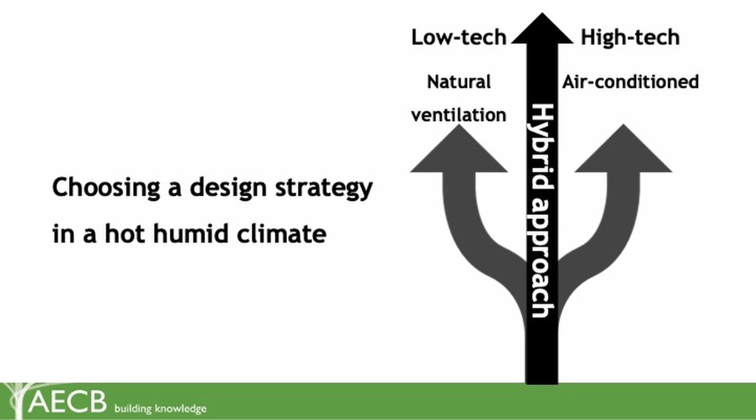So generally, when we're designing in a hot, humid climate, and even in hot arid climates, you kind of have to decide, do you go the natural low-tech ventilation route, or do you have to go the high-tech air conditioning? Because, particularly in the hot, humid climate, those are 2 completely different routes. They're not very similar. In a hot, dry climate, they're a bit similar. The strategies are very much the same. But we wanted to try looking at a hybrid approach. And that's part of what we're going to be talking about.

So one of the first challenges of designing in the Global South: power cuts. They last so long. In Sudan, they last 8 hours, 3 times a week. And that's a long time. And you don't really understand the impact of a power cut until you experience it. It's so hot there that you don't want to think. You don't want to do anything. Life stops. Even if your laptop is charged, you don't want to use it anymore because you're so tired.

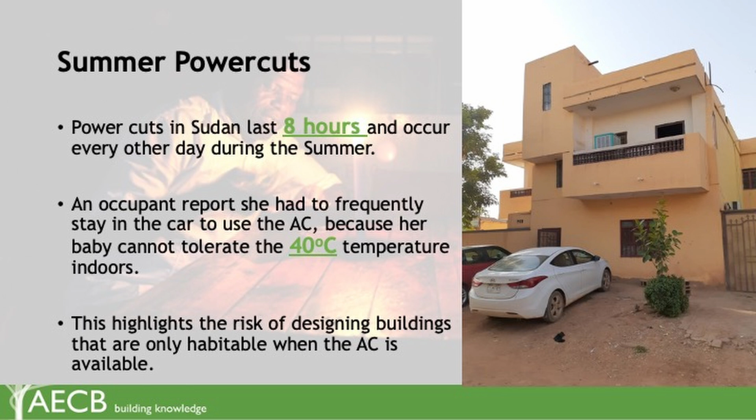And this is a photo of a house I did some research in. For the occupant in this house, when there was a power cut, it would reach 40 degrees in there within an hour of turning off the air conditioner. And she only had that tiny little balcony to stay in. And that balcony is so close to that wall that is just radiating heat. At the same time, you can see just how high it is. So you're not getting any actual shade from the sun, and you're getting the heat coming back to you from that thermal mass behind you.

So because of that, she opted to stay in that car over there. And she would stay there for hours with her toddler, because her toddler would just not stop crying because of how hot the house is. So imagine if you designed a building that only works well when air conditioned, when mechanically ventilated, and then this happens 3 times a week, 8 hours a day. So it's not an intermittent problem. It's not something that might happen. It's something that is going to happen, and quite frequently. And that's a risk you have to consider whenever you're designing in the Global South.

The other issue is that you have to consider, what about all the other buildings in the area that you're designing in? So even if you're going to design a very highly efficient building, if everyone else around you is using natural ventilation and just fans, which don't consume a lot of energy, your building is going to consume significantly more than they are. And that kind of feeds into your decision, do I air condition this building or not?

So that's in the context of Tanzania in our project. The houses surrounding us, the area was all naturally ventilated. People were used to a natural way of living. So it made less sense to introduce a highly efficient enclosed air-conditioned building. But, for example, in my research project in Sudan, people were slapping air conditioners onto buildings that were not prepared for it. So they were very, very highly consumptive. So trying to achieve that highly efficient air-conditioned building would make more sense in that urban context in Sudan than it would in the rural context of Tanzania. And it's just that decision-making process that you have to go through when you're designing your building. What is the area surrounding me?

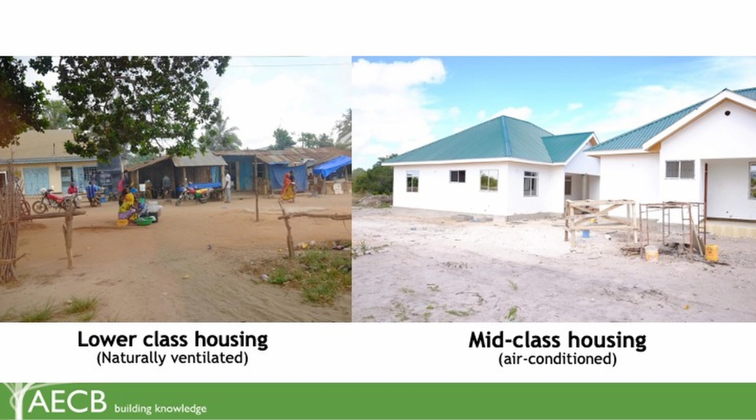So these are some of the houses in Tanzania. You can see they have a mix of both. The predominant is those lower classes, but recently some areas have been knocked down and people are building closed middle-class houses with air conditioners. But the problem is, again, they're just a normal house with an air conditioner. They're not designed to be air conditioned. That's kind of one of the problems.

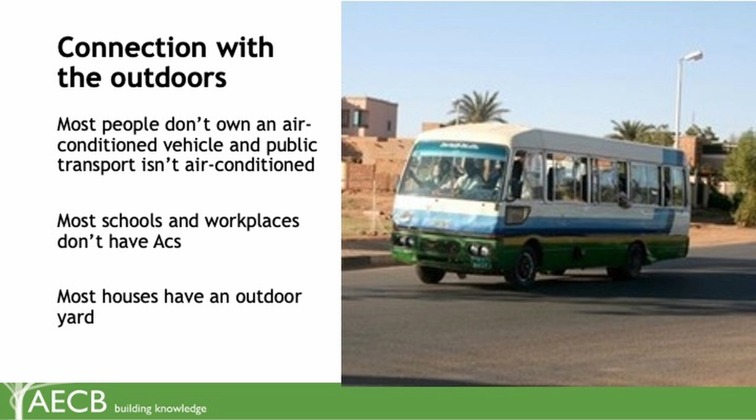Another factor you really need to consider when choosing what model: how connected are the people to the outdoors in your context? So in the context of Tanzania and in the context of Sudan, people use public transport, which is not air-conditioned, as I can attest. Many schools and workplaces don't have air conditioners, and people have yards in their houses. So people interact a lot with their outdoor environment, and that's more so in rural areas than urban. In the urban area, they're more likely to have a car, so you have to kind of consider that.

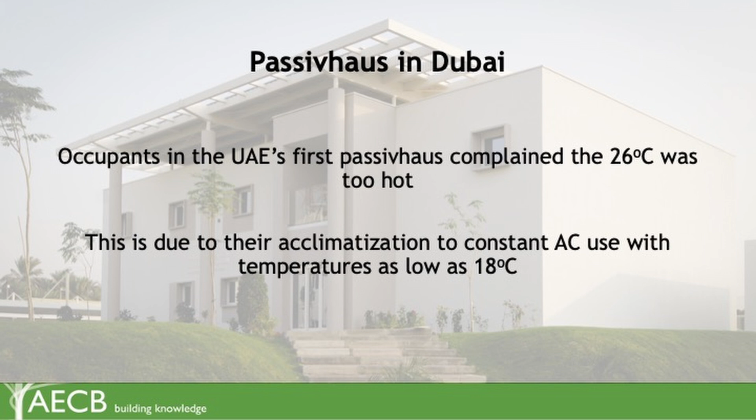Now that comes into play in this example. So this is a Passivhaus building in Dubai. It was one of the first, and the occupants complained 26 was too hot, which is the set point of that building, which is absolutely ridiculous that they're in a climate where it's 45 degrees outside and they're saying they can't tolerate the 26. And as someone who's lived in the Middle East, I understand why.

In the Middle East, you stay in an air-conditioned villa, centrally air-conditioned. They set the set point at 18, and it will be absolutely freezing in the middle of summer, and you're covered in a very heavy, thick blanket. You go into your air-conditioned car, into your air-conditioned school or air-conditioned workplace. There would be weeks where I hadn't seen the sun or the outdoors, and most of the population has a vitamin D deficiency in the desert.

So that's a different context to show you that not all cooling climates should be summed up together with a solution that works for all of them. Another very, very big problem is supply chain. So in a lot of these countries, electricity is cheap. And even if it's not cheap, it's a lot cheaper than the imported materials, particularly insulation.

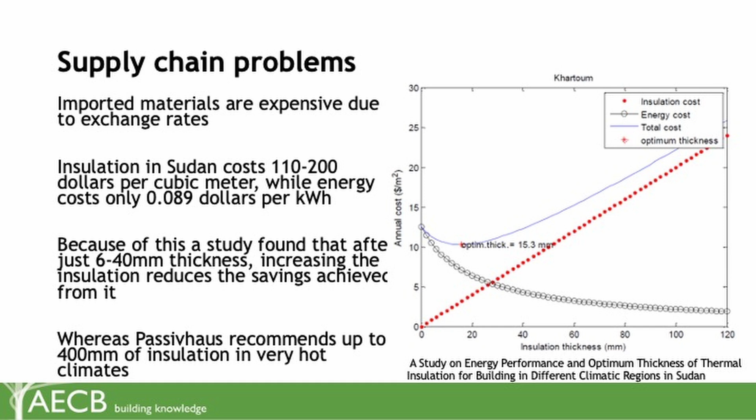So you can imagine here that challenge that if you're going to say, okay, let's insulate, you have to be very selective of how much you can actually get and where is it going to be sourced? Is it going to be imported? Again, giving you that contrast so you can understand the idea a bit more.

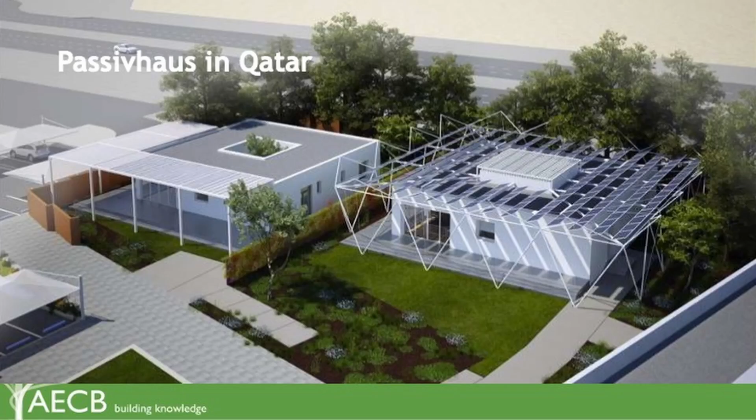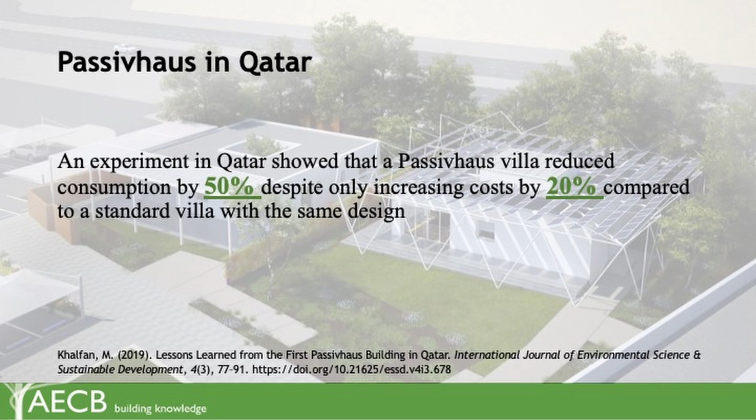This is a Passivhaus in Qatar. So they built these two villas as the exact same everything, but one of them is how a standard way in Qatar it would be built, and the other one is a Passivhaus. And they found it reduced their consumption by 50%, even though it only cost 20% more. Now you might think, why is this? The reason is, well, in Qatar anyway, they import everything. So this is just importing something different, and that's why the cost wasn't a big difference.

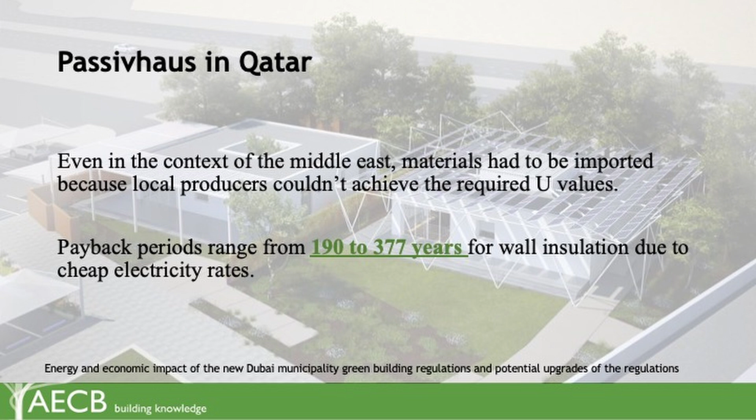But in that context as well, because they had to import a lot of stuff, and because electricity is very cheap in Qatar, when they tried to do a payback period, they found that payback period was 190 to 377 years. So getting energy savings was not going to be an incentive in this context either. It's just purely for environmental reasons.

Another big problem is skilled labor issues. In these countries, skilled labor usually migrates out abroad. There's a lot of brain drain. And because of that, even just building a normal house is very challenging to build it in a good way. So let alone when you try and introduce something that requires a lot of technical sophistication, like for example, achieving airtightness. How realistically can you achieve that when the labor there just is not aware of it? And Andy is going to talk a little bit about the challenges we faced in Tanzania.

It all seems so easy now. Now I'm back. Clicker. Have I got slides with this one, or am I just remembering? I don't have a slide yet.

Okay, challenges. So, for those of you who didn't come to the first workshop, the context is an eco-village, a permaculture-based 30-acre site which incorporates orphan children living with house mothers in units of accommodation, learning growing skills and making skills and having a basic education. It's a Muslim community. The site includes wooded areas, composting areas, all the things you might expect from a little permaculture experiment, and a wildlife zone.

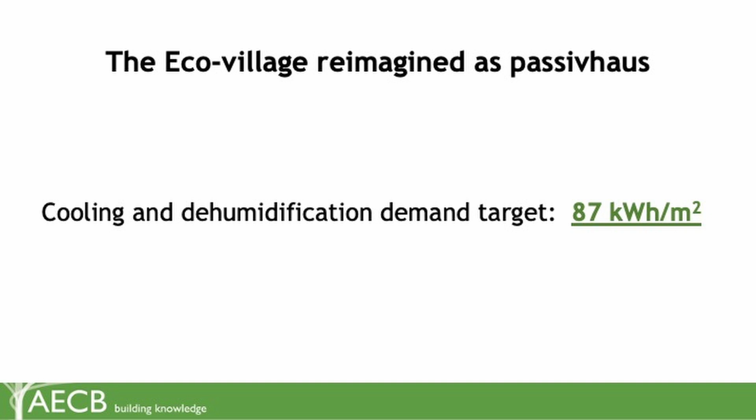Okay, so we're going to talk about the third context, which is Passivhaus in the context of the Global South. So we wanted to see, if we wanted to turn our project into a Passivhaus, what would it require? First of all, the cooling and dehumidification demand would be 87 kilowatt hours per meter squared, which is significantly higher than what it is for a heating climate, which is just 15. And that's because Passivhaus acknowledges that in these countries, you can't really do that with 15. It's a lot. And now consider this compared to how much it would be just using a fan. It's a very significant load because you're not only cooling, you're also dehumidifying.

So specifically to change our building, if we wanted to achieve Passivhaus, we'd have to add more insulation to the walls, roofs, and floors, which, as we mentioned, has that challenge of sourcing it, and also in the other workshop, Andy mentioned that if we put it in the ceiling, there's the risk of bats and animals and stuff. So we're still trying to figure that.

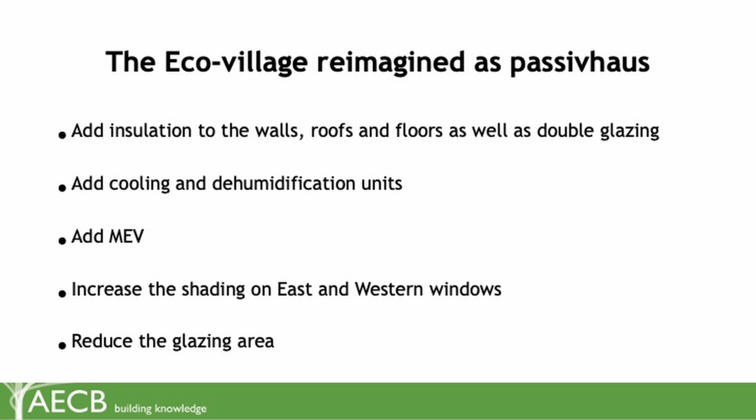But we'll also have to use double glazing, and in our current design, we're not using any glass at all. We'd have to add cooling and dehumidification units. We'd have to use MEV. So we'd have to kind of completely transition into air conditioning, because you can't run both modes at the same time. We'd have to increase the shading on the eastern and western walls even more, and we'd have to reduce the glazing area. I say glazing area, but we don't actually have glass. So then that becomes the question.

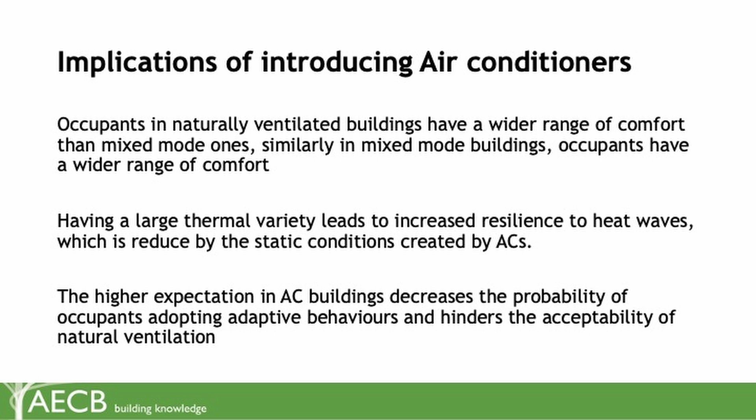What is the implication of introducing an air conditioner? And we kind of touched on this in Dr. Roberts' lecture earlier, that people should have access to an air conditioner when it's really hot. It's a fundamental right to be comfortable, just as it is to heating. But the problem with air conditioning is that it has a lot of impact on the humans themselves.

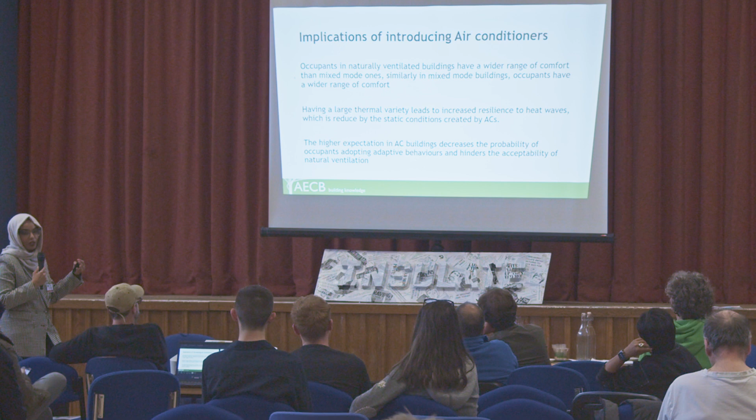First of all is expectations. Once people start getting used to a significantly cooler temperature, they no longer are comfortable with higher temperatures. It becomes a problem, because then they become less resilient. If there's a heat wave, if there's a power cut, they're now used to a much smaller comfort zone, because that's what their body is constantly being exposed to.

Another problem with the air conditioner, it encourages you to stay indoors. So you lose that connection with the outdoors. And all of these parts are fundamentally part of the adaptive thermal comfort model. The adaptive thermal comfort model, if you've seen from our first workshop, has a very wide range of comfort. But to do that, first of all, you have to have a connection with the outdoors, because you have to experience those outdoor temperatures. And that's what makes your body ready to adapt to those changes. You physiologically change, your blood vessels change, your sweat rate, you kind of adapt.

You lose that. Another part is introducing air conditioners is a big leap, because it makes occupants reliant on the building to do the work for them. And a lot of adaptive behaviors are an integral part of communities and their behaviors. Like I mentioned in the first workshop, in the village we used to sleep outdoors, and that was part of our daily routine. We'd spray the yard, we'd have a conversation, we'd clean in the yard, and then in the morning we'd bring the beds all back in, and in the midday we'd have a nap, because it's the highest point of the day.

And so you open the windows, you close the windows, but the air conditioning reduces that interaction with the building to just one button. You just click it on, off. And that creates a reliance that is really, really hard to break off later on. So whenever an air conditioner is introduced, it has to be done carefully, which is the second point. You have to make sure that you do it in a way that keeps all those other systems in place, that people still have that connection with the outdoors, that people are still able to continue with their adaptive behaviors, that they're still able to interact with the building, that it becomes an aid, not a reliance, which is what we've been exploring in this project as well.

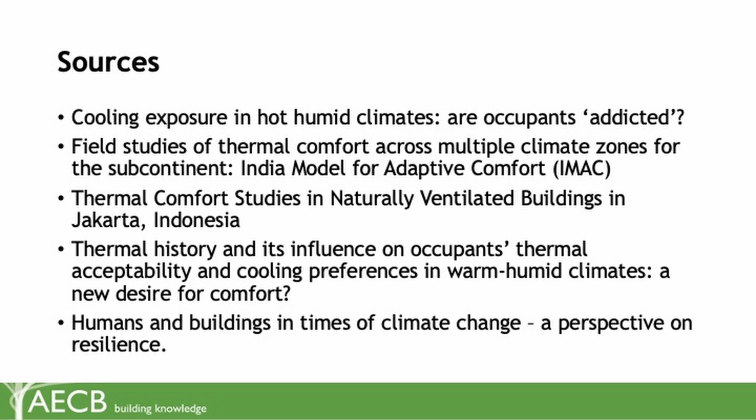We're looking at introducing air conditioners in the bedroom, but in a way that when they use the air conditioner, they can turn it off and they can go back into the natural ventilation mode, that it's not mutually exclusive. These are some of the sources about the impact of air conditioning on users and the impact on their health, on their comfort, on their resilience.

So in the context of the global south, a lot of the time we can't really achieve a highly efficient building like a passive house. But at the same time, we kind of have to get out of that mentality of all or nothing. We have to be able to do something to improve people's lives. And we should think of sustainability not as black and white, but as a spectrum of possibilities. Wherever we can make an improvement, we should try.

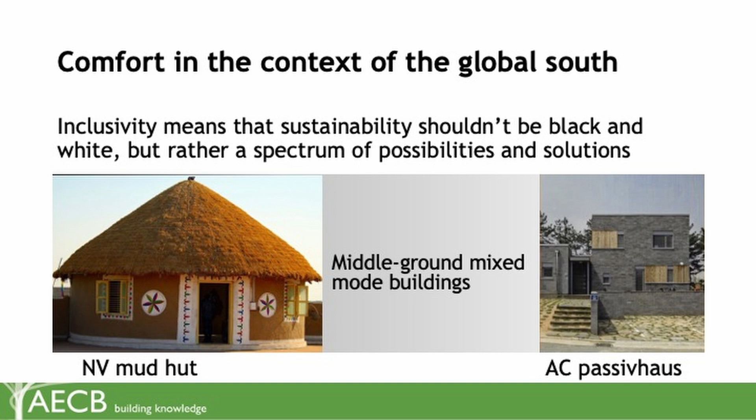So right now, the way it is in a lot of African countries is you either have a naturally ventilated mud hut, traditional life, 100%, or you'll have a very rich population living in an AC passive house. This is one, for example, in South Korea, where it's also a cooling climate, but it's still very, very hyper modern. So what we're talking about is, what about this middle ground? What about mixed mode buildings that are more accessible to a wider section of the population who can't afford that passive house, but also don't want to live in that mud hut that is fairly comfortable, but can't be used because of social stigma, because it doesn't fit with their modern expectations.

So it's like Dr. Robert said, we can't eliminate the air conditioner, we have to incorporate it, but we have to incorporate it in a way that is smart and methodical, not just adding it.

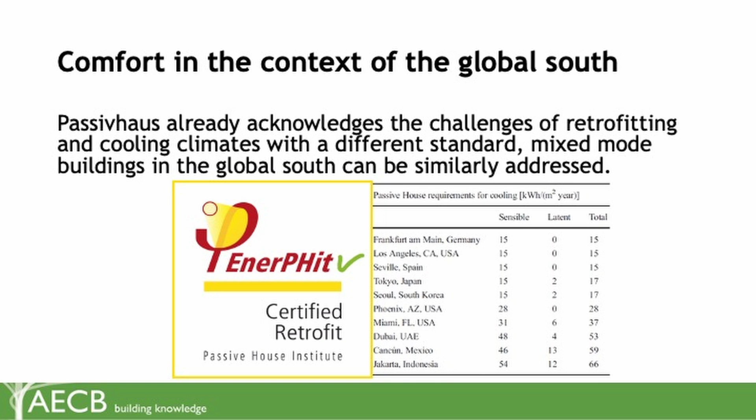So Passivhaus already acknowledges the challenges of retrofit. It created a separate standard, EnerPHit, for retrofit buildings because it realized it's really hard to get a retrofit as good as a new build. And in the workshop yesterday, one of them mentioned that it's almost impossible in a house from the 1990s to get really good airtightness. And Passivhaus also addresses the challenges of a cooling climate. Here you see the kilowatt-hour cooling targets for different countries. They're all cooling climates, but Passivhaus acknowledges the differences, so it has different allowances for each one. So Passivhaus generally has this understanding of the different challenges.

And what we're trying to introduce here is, what about the socio-economic restriction? How can it address mixed mode buildings that are trying to achieve sustainability that is not 100% Passivhaus, but also not a mud house, somewhere in the middle? And that is the project that me and Andrew are working on.